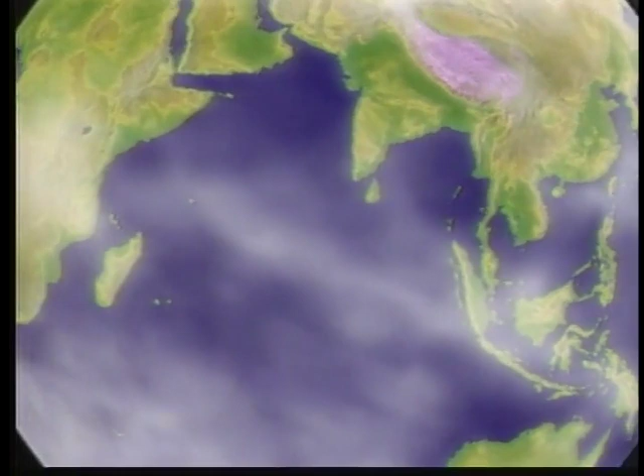Water, water everywhere, yet not a drop to drink. So went the complaint of the ancient mariner as he looked out over the salty brine. Although the Earth is sometimes referred to as the water planet, only a tiny fraction of this water is usable by human beings.

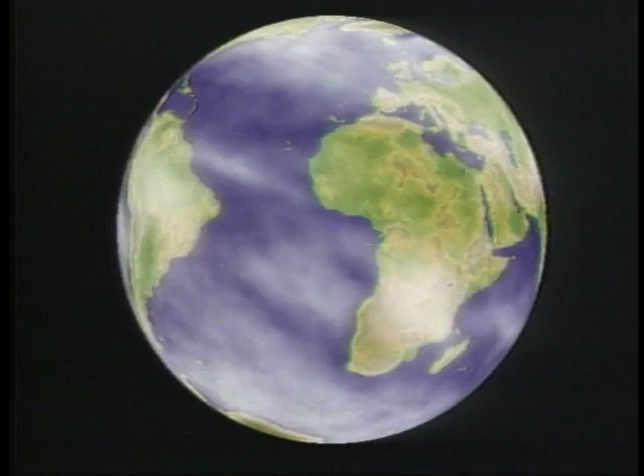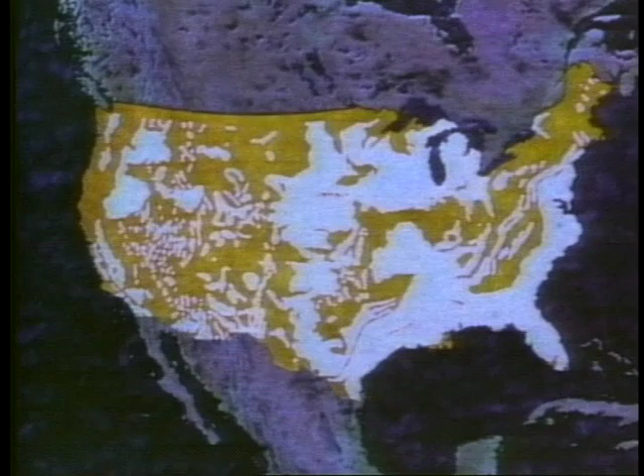And most of this fresh water comes not from above, but from beneath the Earth's surface. This groundwater originates in various ways. Water percolates continuously into the earth from lakes and rivers, for example. Most important of all, however, is rainfall.

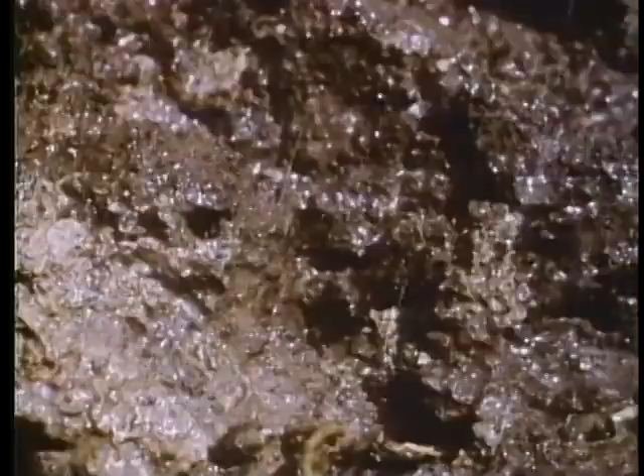In some places, rainwater readily disappears into the ground. Of course, water doesn't get beneath the land surface with equal ease everywhere on the globe. When it lands on hard bedrock or asphalt pavement, it simply runs off to feed nearby streams and rivers.

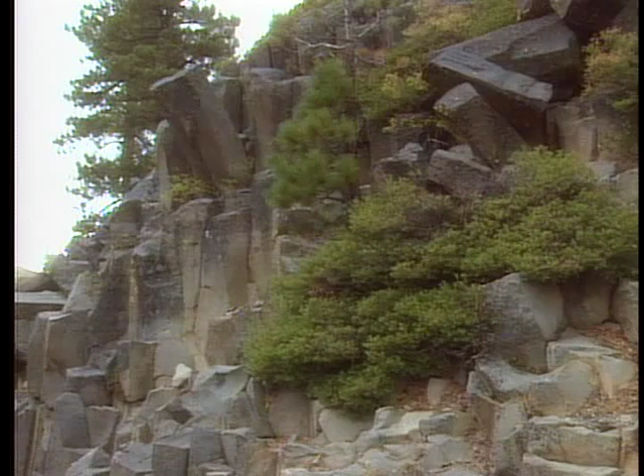But if there are cracks or fissures in the surface rock, the water can pass through to collect underground. Even hard rocks, such as basalt or granite, usually have some fractures in them through which water can permeate.

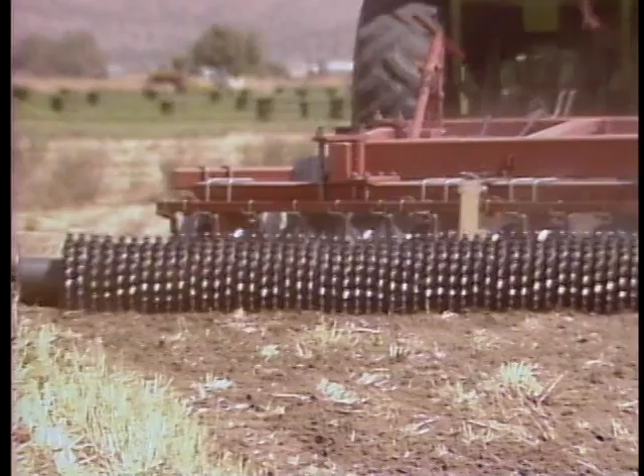Other land surfaces consist of less solid aggregates of material, such as sandstone or sediment or ordinary soil. Here, the water can work its way down through the gaps, or interstices, between the individual bits of matter.

Although permeable rock will let the water through, it still may not be a good source of groundwater. For a rock to contain abundant groundwater, it also needs to have a lot of open spaces, or pores. The capacity to transmit water is called permeability, and the capacity to store water is called porosity. The ideal rock material for the accumulation of groundwater is both porous and permeable.

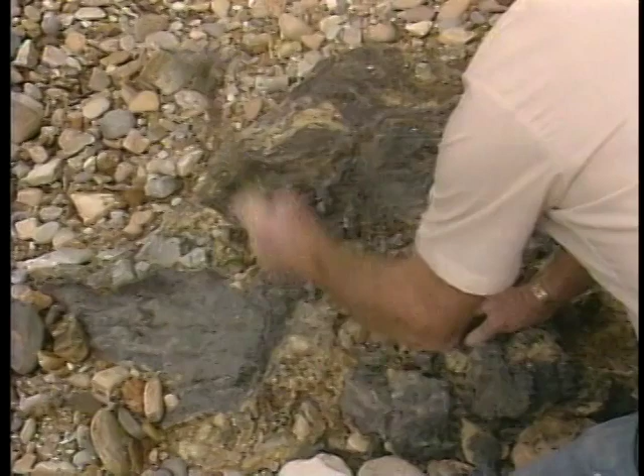This kind of material is known as an aquifer, from the Latin for water-bearing. Sandstone is a good example of an aquifer. Clay, on the other hand, is a material that tends to exclude the flow of groundwater. It is an aquiclude, the opposite of an aquifer.

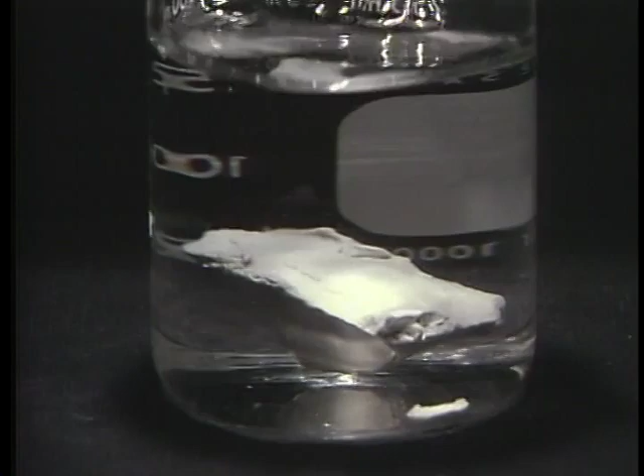As clay absorbs liquid, its individual grains swell up while becoming saturated and close the channels between adjoining pores, thus blocking the passage of groundwater. While groundwater has the effect of making clay layers swell, it can eat away other rock types.

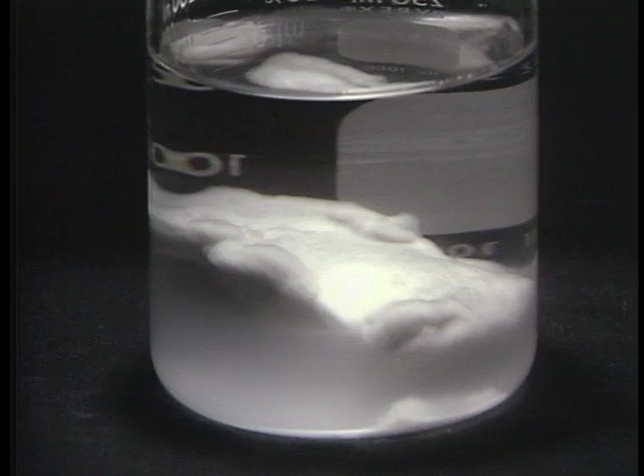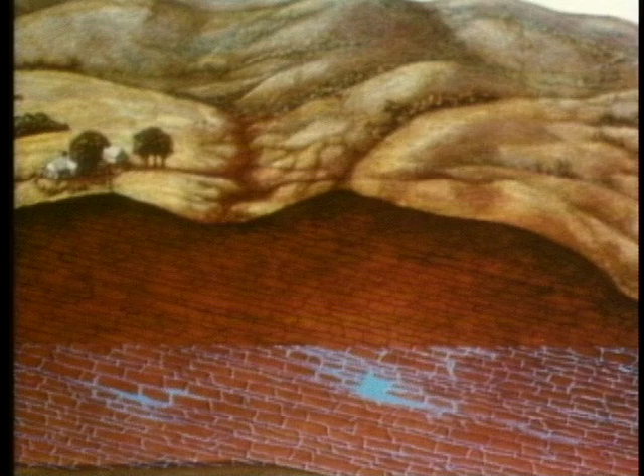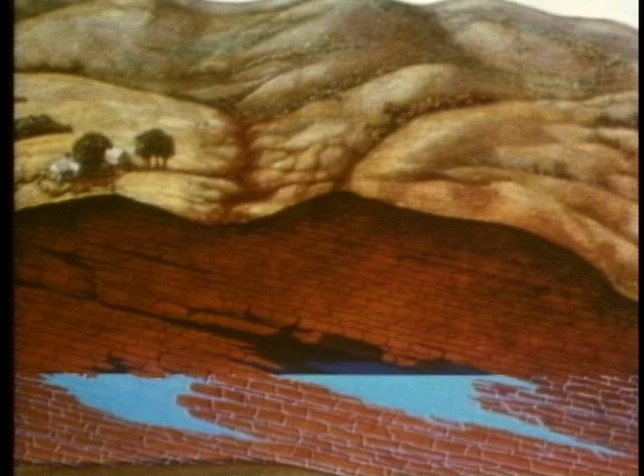The most vivid example of this is the formation of caves. Infiltrating groundwater is always slightly acidic because it has reacted with carbon dioxide in the air, thus forming carbonic acid. This acid gradually dissolves limestone, especially along joints. If the groundwater eventually drains off, it will leave behind air-filled caverns.

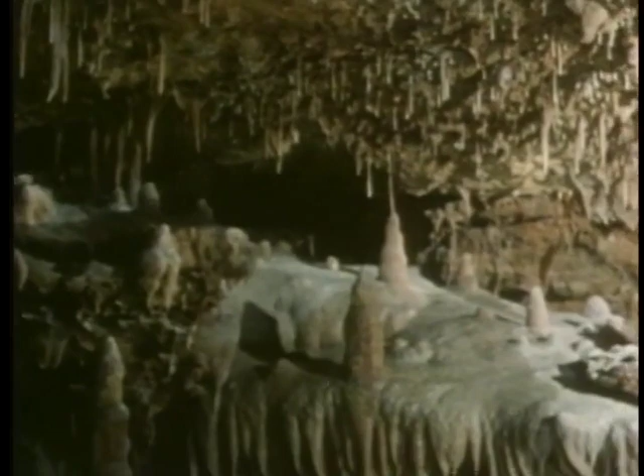Columns of rock build up inside these caverns. These formations are created by droplets of groundwater seeping into the caves.

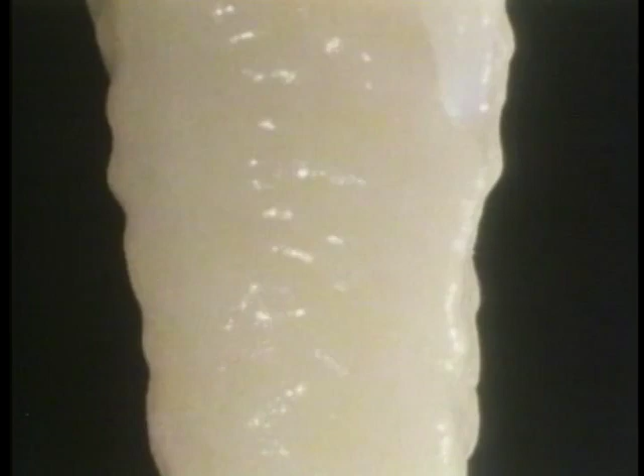As each drop clings to the ceiling for a brief moment, enough evaporation takes place to precipitate a minute amount of calcium carbonate. Over centuries, untold millions of such microscopic grains of rock will form stalactites above, and from the buildup of droplets that reach the floor below, stalagmites will form.

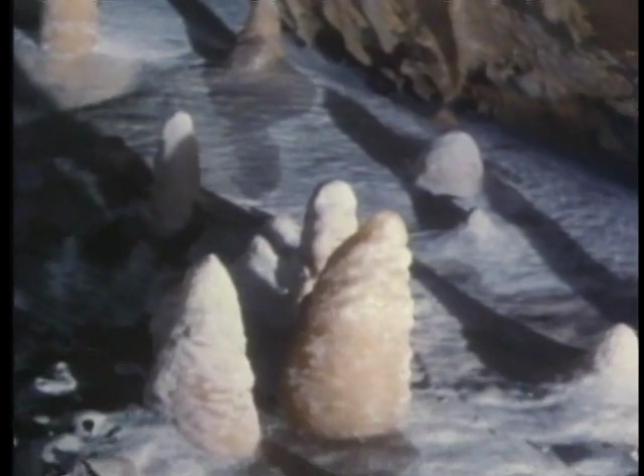In places where caves are still flooded, geologists can trace the flow of groundwater by releasing non-toxic dyes that will ultimately reappear at the Earth's surface in the form of springs and rivers.

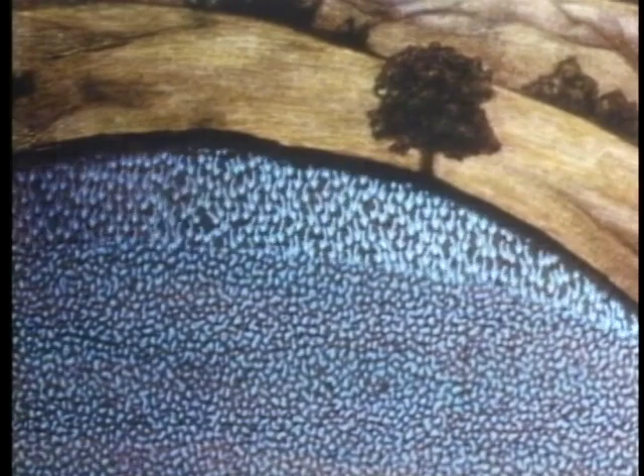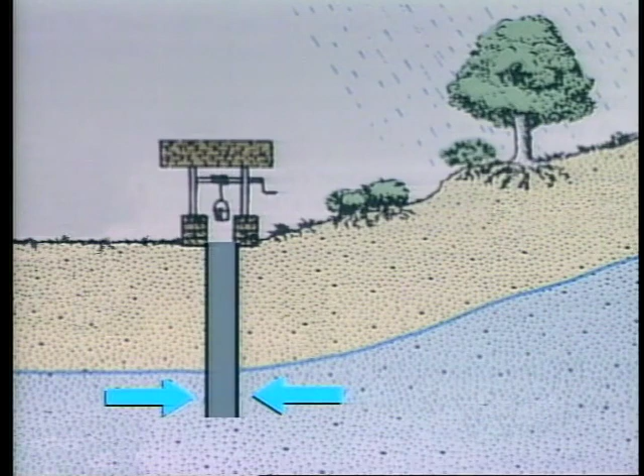One reason geologists study groundwater is to learn how it moves beneath the Earth's surface. The area in which the water accumulates is known as the saturated zone, and the layer above it, the unsaturated zone. When a well is dug into the saturated zone, the groundwater will fill the lower part of the well. The water level inside the well marks the upper surface of the saturated zone. This surface is called the water table.

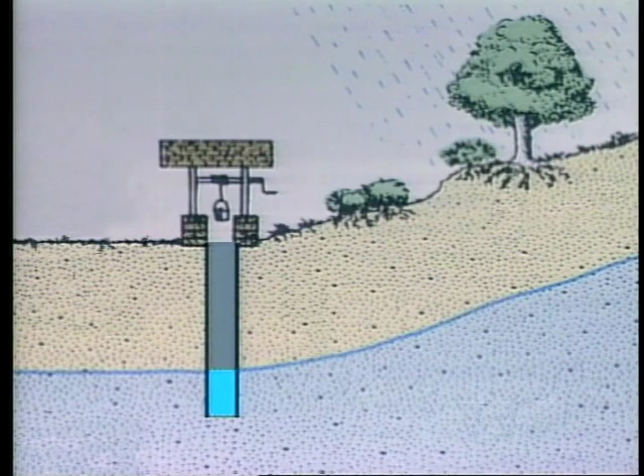Where the land surface is flat, the water table beneath it is also flat. But where the land is hilly, the water table will also have an irregular surface, with high and low parts roughly corresponding to the overlying topography.

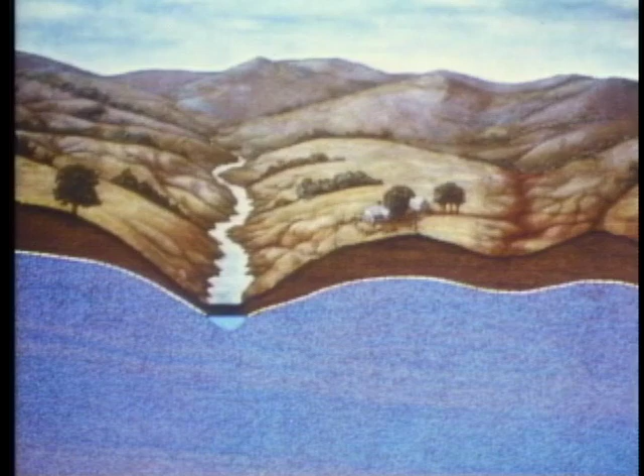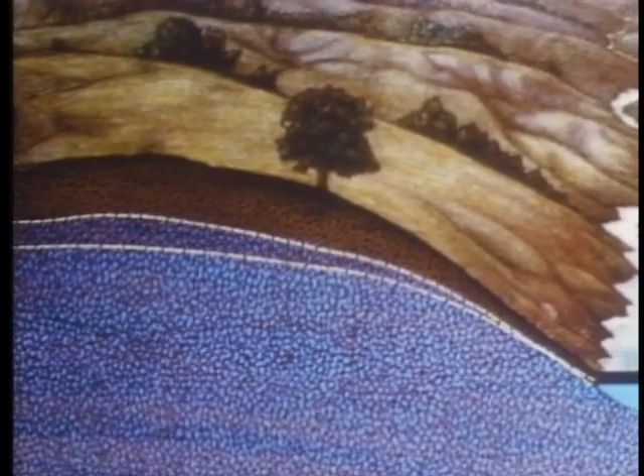In valleys, the zone of saturation may rise to meet the Earth's surface at river and lake beds. When the rivers and lakes are full, a continuous supply of new groundwater recharges the zone of saturation, and water flows from the surface into the ground. However, during the dry summer months, when surface water levels are low, groundwater may flow in the opposite direction, providing the rivers and lakes with their only supply of water in the absence of rain.

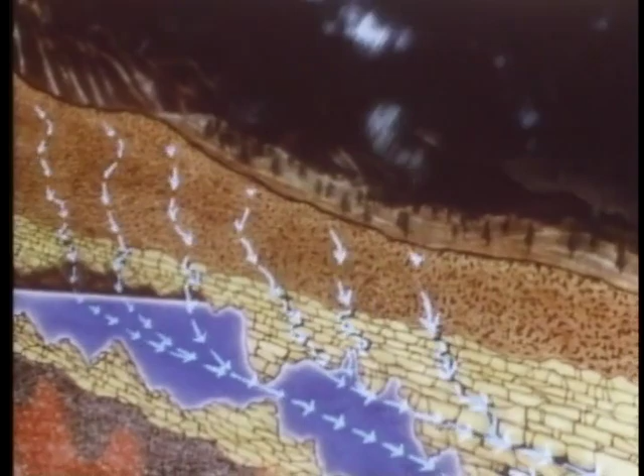This phenomenon is called effluence. Where groundwater flows out through an opening to the surface, as for example along a joint or a fault, springs form.

Most springs flow year-round, even through the long, hot months of summer when they might be expected to dry up. This is because the water that comes out of the ground in the summer may well have started its journey the previous winter.

Getting water out of the ground requires working against gravity and pumping the water up. But in some wells, the groundwater will move upward of its own accord, in apparent defiance of gravity. These are called artesian wells.

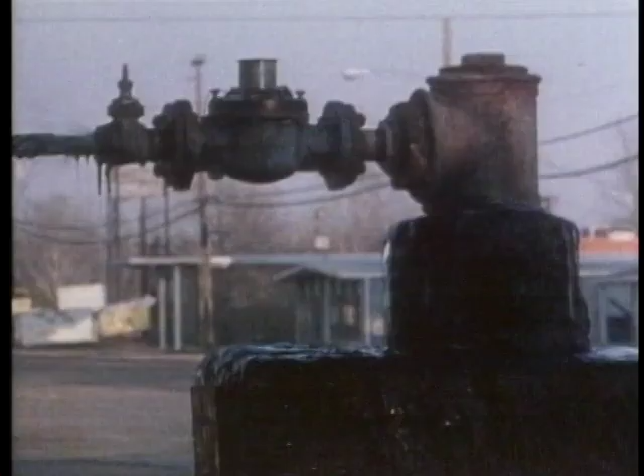To understand how these valuable wells work, a classification of aquifers into two types, open and closed, is useful. In an open aquifer, a stratum of permeable rock overlies the water table, so that the pressure of the water, in other words, the hydrostatic pressure, at the top of the zone of saturation is quite low, too low for the water to rise up unassisted to the land surface.

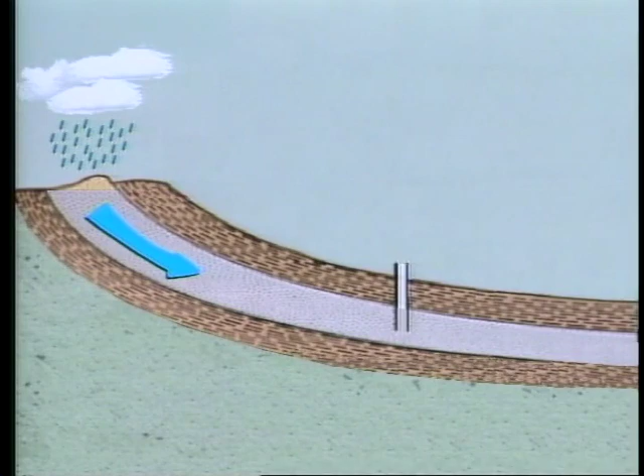The other main type of aquifer, the closed aquifer, is overlain by a layer of impermeable rock, an aquiclude. Where such an aquifer is inclined with its highest level exposed at the surface, water can enter directly into it in what is known as the recharge area. The weight of the water entering the inclined aquifer via the recharge area, combined with the confining effect of the layer of impermeable rock above, causes hydrostatic pressure to build up.

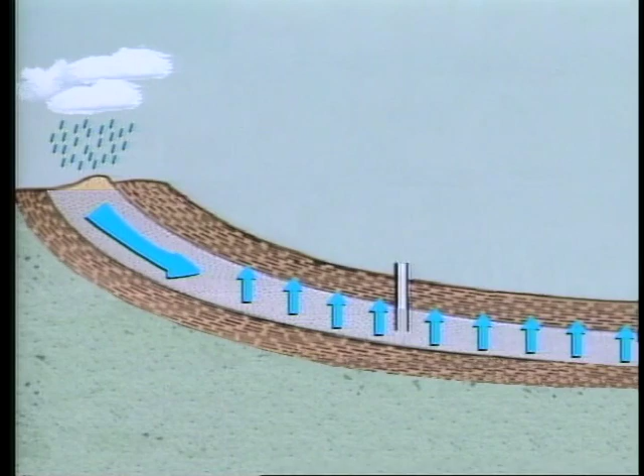If a well is dug in the appropriate place, this pressure is often strong enough to drive water up to the surface against the pull of gravity.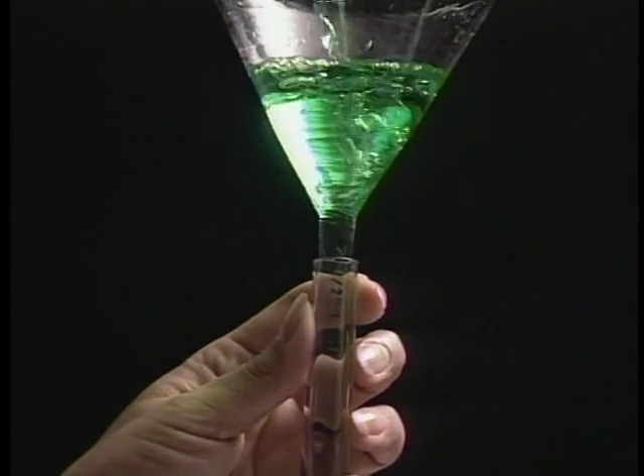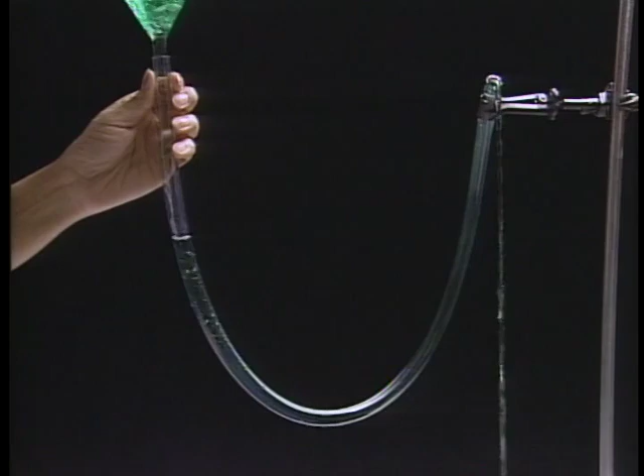One way to better understand how hydrostatic pressure can make water flow upward is to try a simple experiment with a hose. When water is poured into the higher end, its weight drives the water up and out the lower end of the hose, even though the lower end is above the sagging middle of the hose.

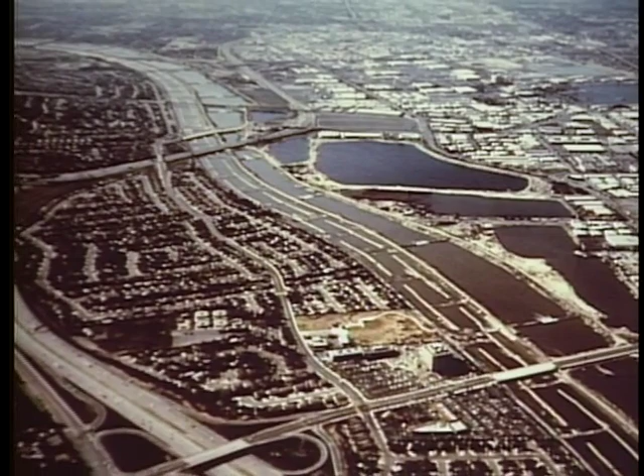This is all the more surprising because before its settlement, low rainfall made most of this region a virtual desert. The coastal plain of Southern California, of which Orange County is a part, is particularly well suited for groundwater storage.

It has several things going for it. It's very deep, some 4,000 feet deep, and all containing fresh water, of which we only use about the upper 1,500 feet. It has a surface water supply. It's the only perennial stream in Southern California.

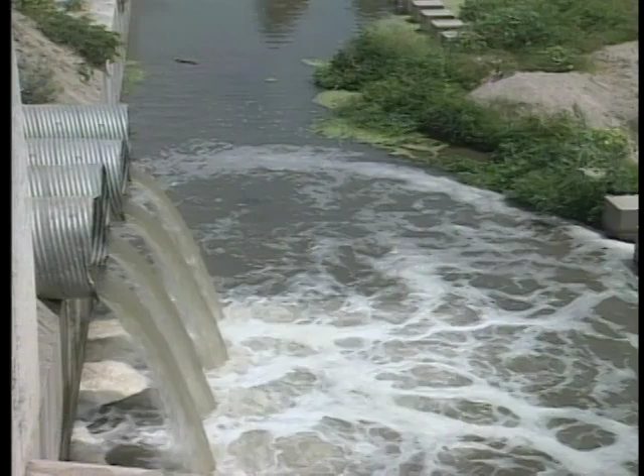This stream is fed by snowmelt in a very large mountain range behind us. Again, in a desert area, we have snow that feeds a perennial river system which provides continuous water supply.

Another factor that helps out a great deal in maintaining the flow of the water down this river is the fact that we have considerable residential and commercial development upstream of us, which provides us waters of wastewater origin. That means the water has gone through a treatment plant once upstream and has gone through a series of biological cleansing activity, which provides us with a very suitable supply of water to go into our groundwater basin.

So we're blessed with very permeable soils, a very large storage capacity, and a steady supply of water. Part of the success of the Orange County Water District can be traced to measures taken to recharge the local aquifer.

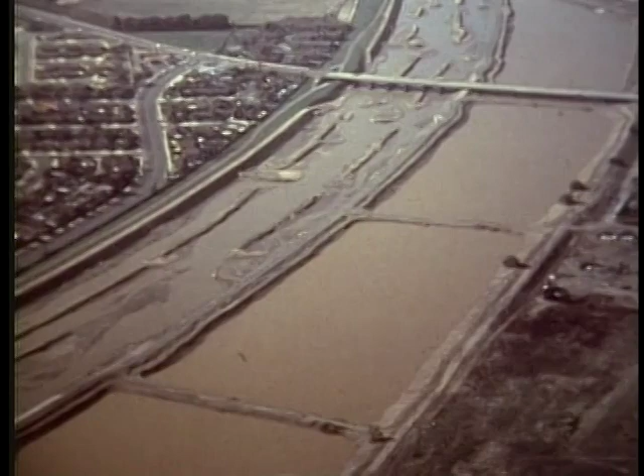One of the ways the Orange County Water District manages the groundwater basin is by ensuring that we put as much water back into the ground as we take out through a series of extraction wells. This is done primarily through our recharge facilities, much like the one shown in the background here. These recharge basins consist primarily of old gravel pits and channel areas, which capture water from the river and divert it into these basins where it effectively percolates into the groundwater.

All of these basins are underlain by porous, highly permeable sediments that connect with the underlying aquifers, which extend down into the lower part of the basin. Therefore, water is able to percolate through these basins into the aquifers and effectively recharge the whole Orange County groundwater basin.

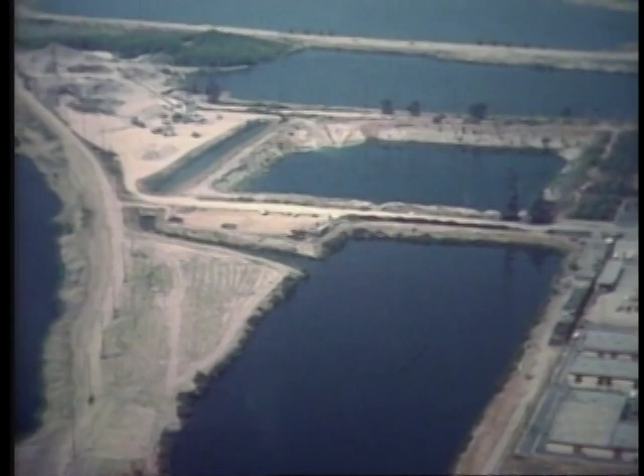Groundwater management requires a great deal of care, not only because the water itself is so vital, but because a diminished supply could cause the ground above to subside, and this, in turn, could trigger a multitude of problems.

As water infiltrates into an aquifer, the permeable rock soaks up the water like a sponge until it's saturated. The weight of this saturated zone generates an aquifer pressure that forces rock particles apart. This pressure also helps to hold up the ground surface, even inflating it slightly. When groundwater is withdrawn, the pressure decreases and the particles pack more tightly together. If the rate of water withdrawal exceeds the rate of infiltration, the overlying ground surface will often subside.

Ground subsidence can be dramatic and have disastrous consequences in areas of high groundwater withdrawal. In Houston, Texas, for example, 3 meters of subsidence has occurred over 40 years of overpumping, resulting in tens of millions of dollars of property damage and the loss of 80 square kilometers of land. One suburb, Brownwood, had to be abandoned completely because of flooding.

In Italy, groundwater withdrawal has caused the lean in the Tower of Pisa and contributes to continued flooding in the canal city of Venice.

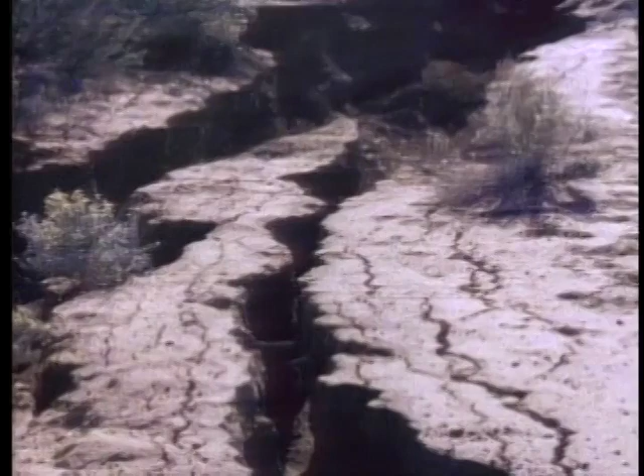Sometimes groundwater withdrawal can cause the ground to collapse, like sand going through the neck of an hourglass, resulting in sinkholes like these. In other regions, the surface of the earth is torn by giant cracks.

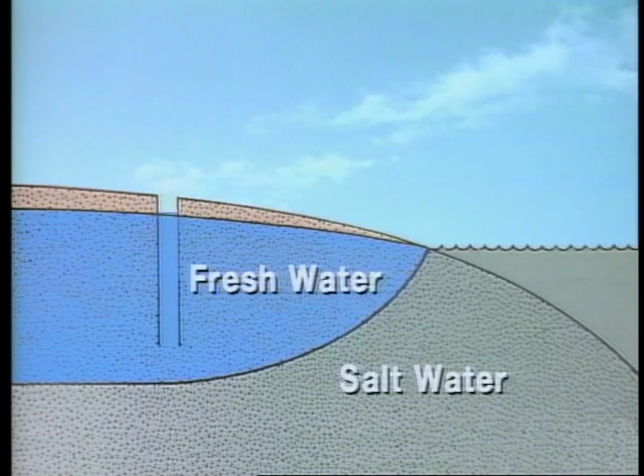In coastal regions, the excessive withdrawal of groundwater can cause other problems in addition to subsidence. Beneath land, groundwater is fresh, but underneath the seafloor it is salty. Since fresh water is less dense than seawater, fresh groundwater just inland from the coast will tend to float on top of a saltwater base. If fresh water is pumped out faster than it can be naturally replenished, seawater will flow in to replace it. As a result, the well water becomes increasingly salty, making it useless for drinking and poisonous for irrigation.

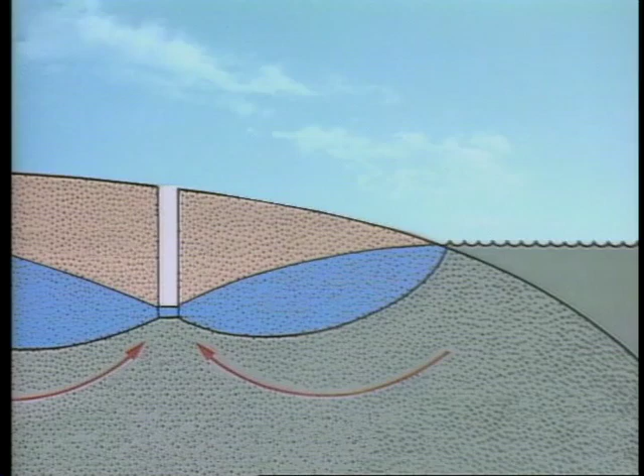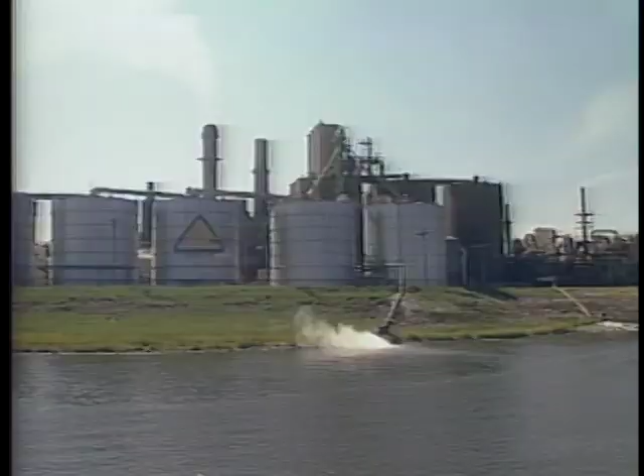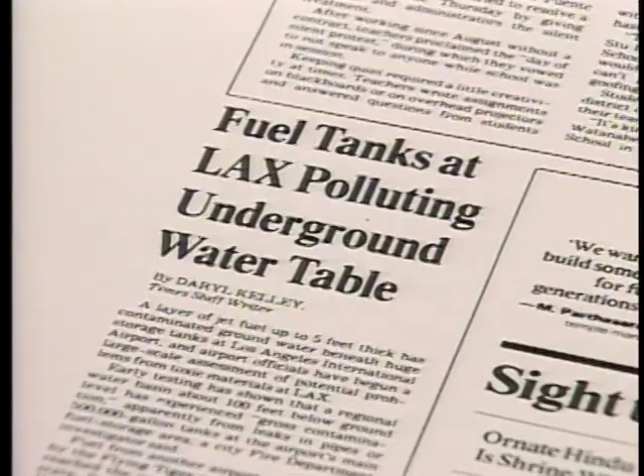Other groundwater pollution problems also exist, involving contamination from many sources, such as factories, farms, septic tanks, garbage dumps, and less often, radioactive waste depositories. Headlines like these about toxic drinking water have been all too common in recent years.

One way in which we pollute groundwater is through badly designed or improperly maintained landfills. When rain leaches the pollutants from a landfill into the saturated zone, a plume of polluted waste spreads out in the direction of groundwater flow. Fortunately, engineers are now developing more effective techniques to minimize the impact of landfills on groundwater quality.

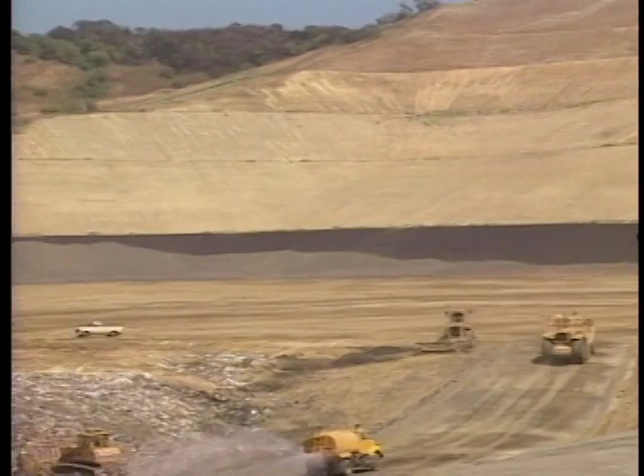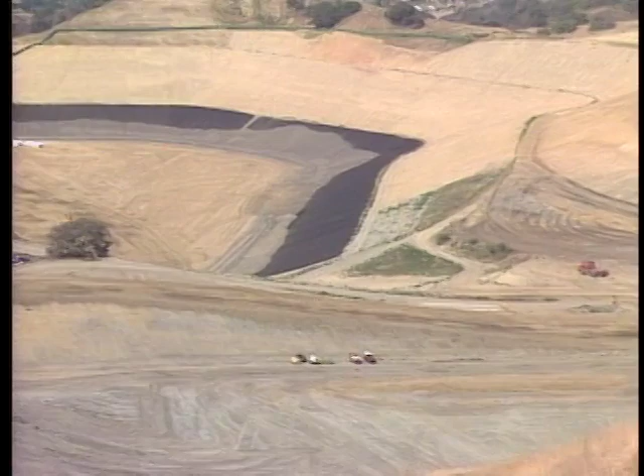One of the techniques that has been developed recently is a landfill liner system. Its multiple layers act as a barrier between the garbage and the surrounding environment. The base of the liner system is simply a layer of impermeable clay, which is spread around the landfill and compacted by heavy equipment. While the clay itself might be adequate to prevent the seepage of polluted water or leachate out of the landfill, extra precautions are taken. A synthetic high-density plastic liner is placed on top of the clay.

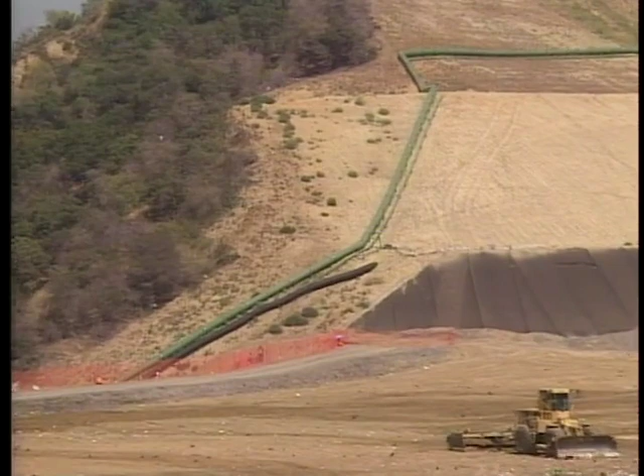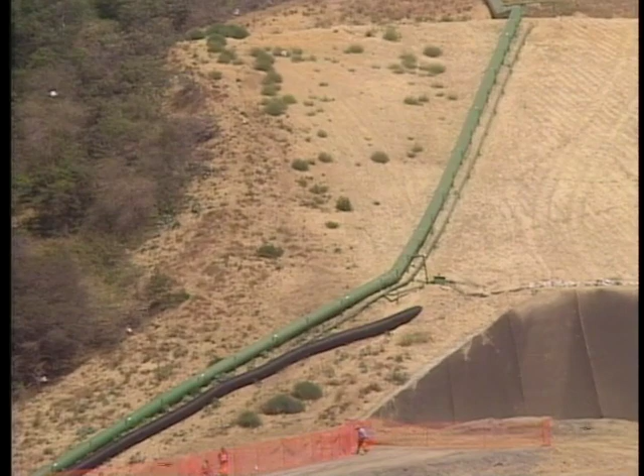Next, a half-meter or so of permeable sand, along with drainage pipes, is laid across the plastic. Here, the leachate accumulates and flows out from beneath the landfill for safe disposal elsewhere. At some landfills, the methane gas produced by decaying waste is collected and burned to generate electricity. And so, a composite landfill liner can serve a dual purpose, protecting groundwater quality and providing an additional source of electricity.

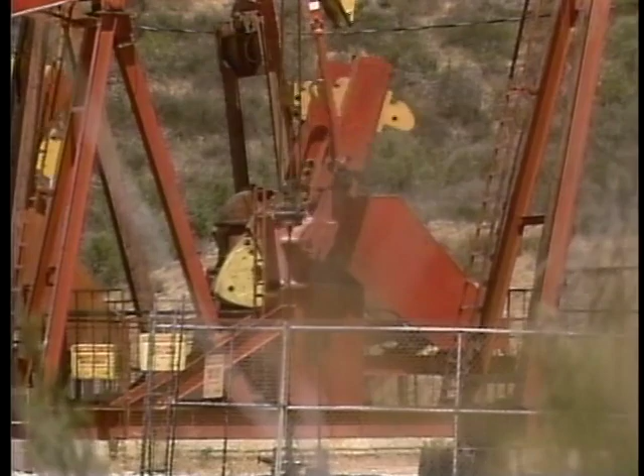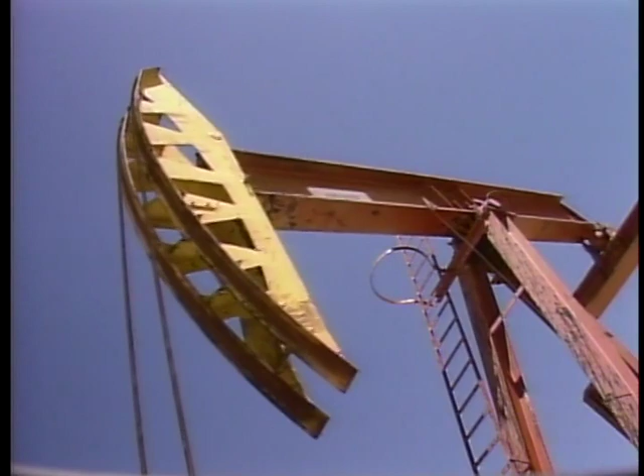The great irony about groundwater is how little attention it often gets in discussions about dwindling resources. We worry about running out of oil, and there's no question that it's of great importance to our global economy. But when all is said and done, life could go on even without hydrocarbons. There are, after all, alternative sources of energy. But when it comes to water, there is no substitute. Without water, life is simply not possible.

Fortunately, groundwater resources are not as limited or irreplaceable, for groundwater is more rapidly replenished by nature than is oil. But the time scale of natural replenishment is very long, at least by human standards. At the current level of infiltration, it would take thousands of years to restore the water supply that has been pumped from beneath many cities in but a fraction of that time.

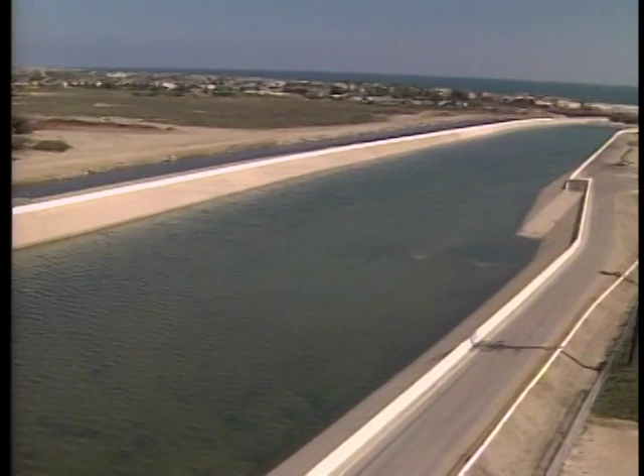In addition to ensuring adequate supply, protecting the quality of water is also of utmost importance. Again, Orange County is an excellent example of how geologists go about doing this. There are two aspects to water quality we have to be concerned about. First of all, we're in a coastal basin, next to the ocean. If we draw the basin down, salt water would flow in to take the fresh water's place and thus severely damage the basin.

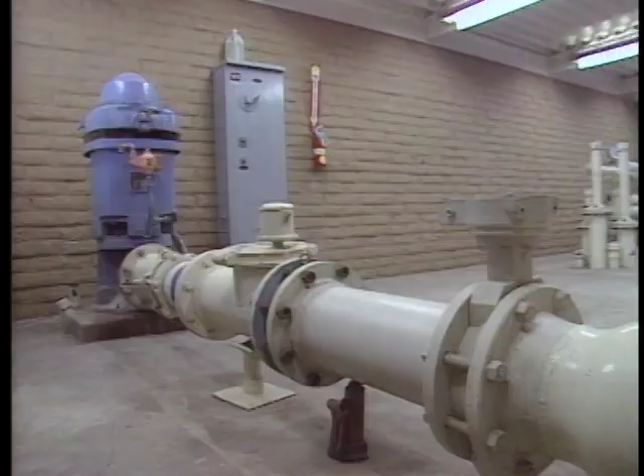The other aspect is pollution. In the case of saltwater intrusion, we have built injection wells along the coast, and we are either putting imported water in them or we're putting reclaimed wastewater that's produced at our Water Factory 21. The Orange County injection wells act as a hydraulic barrier along the coast, which keeps the salt water out even if the level of the groundwater in the basin is drastically lowered.

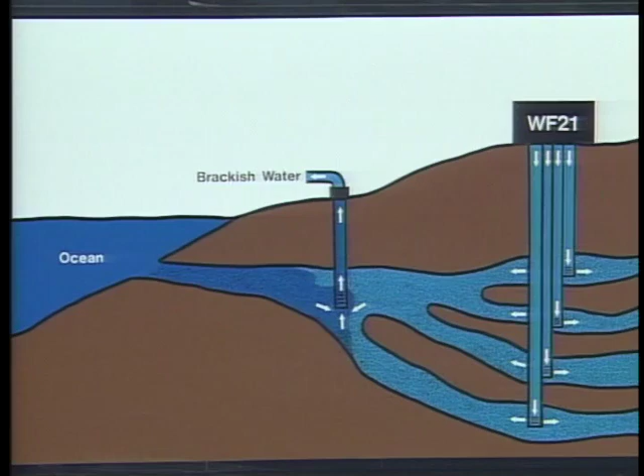In pollution, we have an industrial base in Orange County and much of Southern California. There is more circuit board manufacturing done per square mile in Orange County than any place else in the world. So we have things that potentially could get into our groundwater basin: solvents, heavy metals, etc. But we have a very detailed source control program managed by our sanitation districts here in Orange County that don't allow discharges of that material either into our basins or into the wastewater stream that eventually gets into our injection barrier.

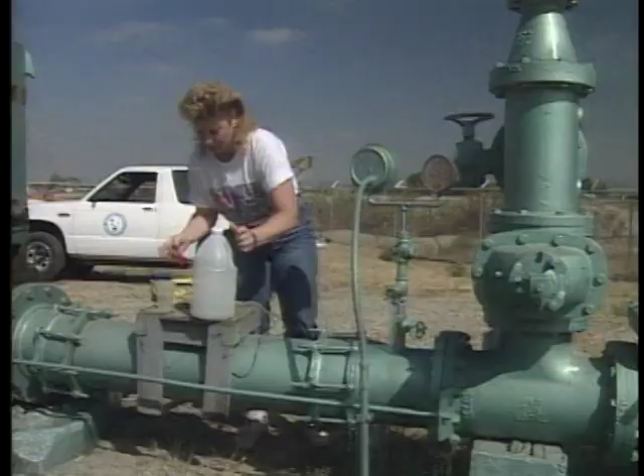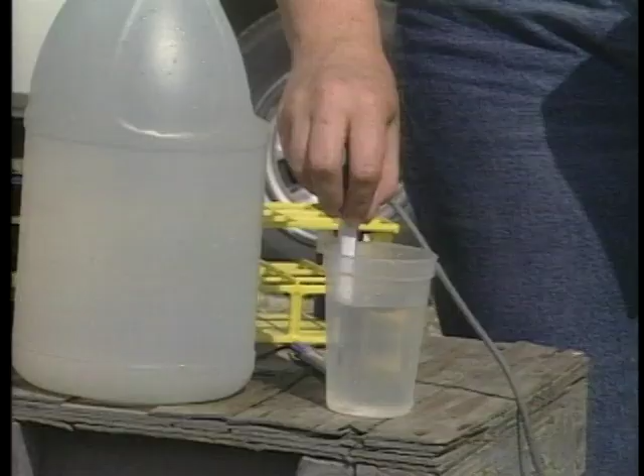Because water quality is such a vital part of groundwater management, it is essential to monitor the water both above and below the surface. Traditionally, we've sampled our groundwater basin at the production well, and we still do that because the next step is your faucet, and we're very concerned about what reaches the faucet. But it would also be nice to know if there's something coming down the aquifer that we don't know about, and find it before it reaches the production well.

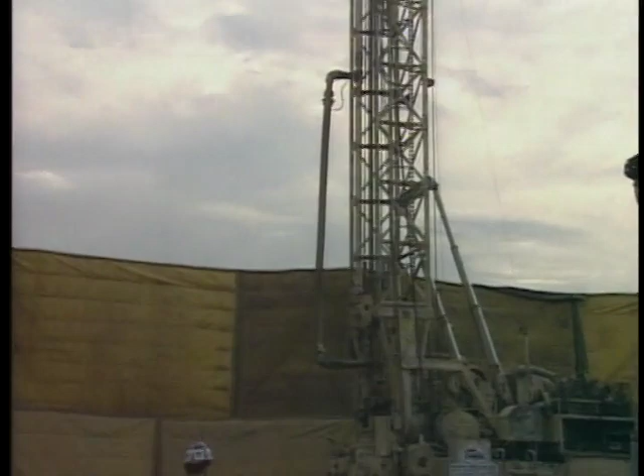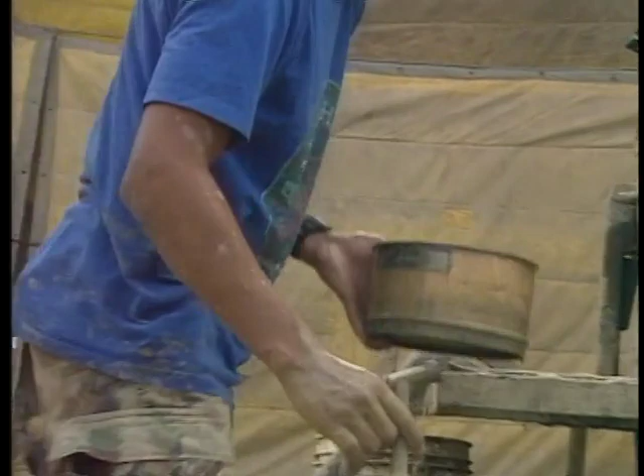So what we've done at Orange County is develop a very sophisticated groundwater monitoring program which uses surface water sampling, production well sampling, and dedicated monitoring well sampling. Our monitoring wells are drilled to a depth of about 1,500 feet and isolate and tap up to 18 zones that we can monitor individually, so that if a contaminant is coming towards a production well, we can find it before it becomes a problem and institute a mitigation.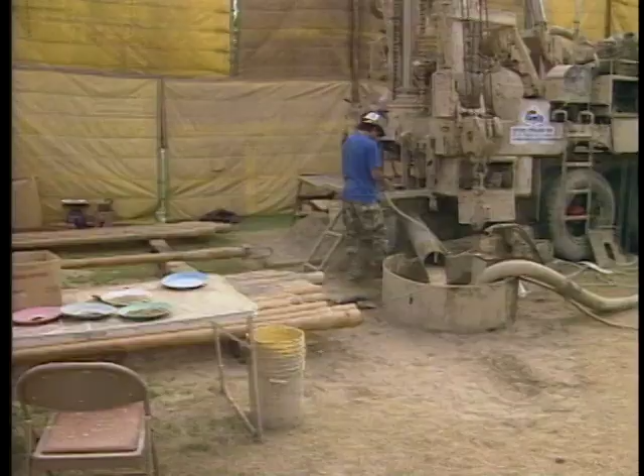The monitoring wells provide a picture not only of when and where contamination is occurring, but also of the geological structure of the groundwater basin. As a well is drilled, samples of the rock are collected and analyzed. From these data, the substructure is mapped and computer models created to predict how groundwater flows through the basin. This information is extremely important because it helps water district personnel plan how to effectively contain groundwater pollutants.

We don't wait for regulatory agencies such as the state or the EPA to come to us and tell us we've got a problem. It's too late then. So we're looking at managing our own groundwater basin as though we had to drink the water, and we do.

Life demands water, and groundwater is an immensely important natural resource. Groundwater is recharged by the infiltration of rain and snow and surface water into the fractures and pores in rocks. Rocks that are both highly porous and permeable make the best quality aquifers and will contain the most abundant groundwater supplies. Aquifers are vital to the water supplies of both cities and farms, but many are being threatened by problems that need to be addressed now if these aquifers are to be maintained and used by future generations.

They are in danger of being depleted, not only by a rapidly rising demand for water, but also by wasteful water use practices. Large-scale land subsidence is a dramatic reminder that the problem of overpumping has been poorly addressed in the past. Aquifers are also in danger of pollution, a problem closely associated with our mounting waste disposal needs and also the increasing toxicity of our waste products.